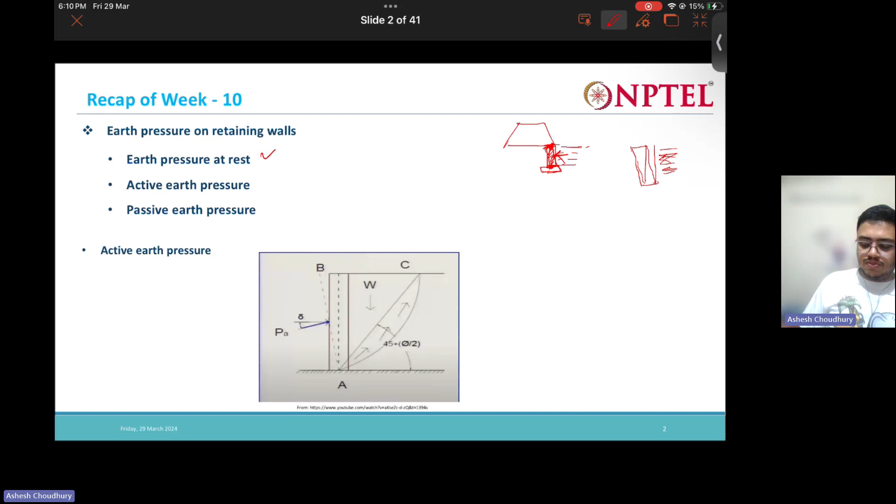After that we have active earth pressure. Active earth pressure means there is a tendency for the wall to move away from the soil it's retaining. In that case, whatever earth pressure the soil exerts on the wall is called the active earth pressure.

The passive earth pressure is the opposite - it's the tendency where the wall is actually moving into the soil. That is the passive earth pressure.

So you might be wondering under what conditions passive earth pressure takes place. Say you have soil like this, a retaining wall like this, and soil on this side too. There is a tendency that the retaining wall would actually move like this.

So if you see in this portion, what is happening? The wall is moving away from the soil here. So whatever earth pressure is acting here is nothing but the active earth pressure. And in this side also, up to here we will be having active earth pressure.

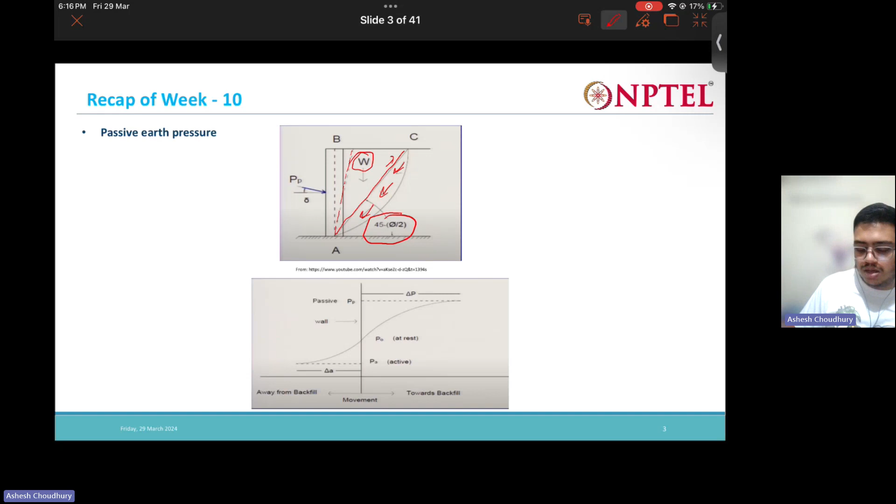And this W here is the weight of the failure wedge ABC.

Say you have a wall like this. There is a tendency for the wall to bend like this because soil is up, soil is like this here, or here also you have some soil. So what happens in this region? We have the active, and in this region we have the passive. If the rotation is about this point versus if the rotation is a total complete rotation, then the case will be something else. So it depends how much deflection the wall is having.

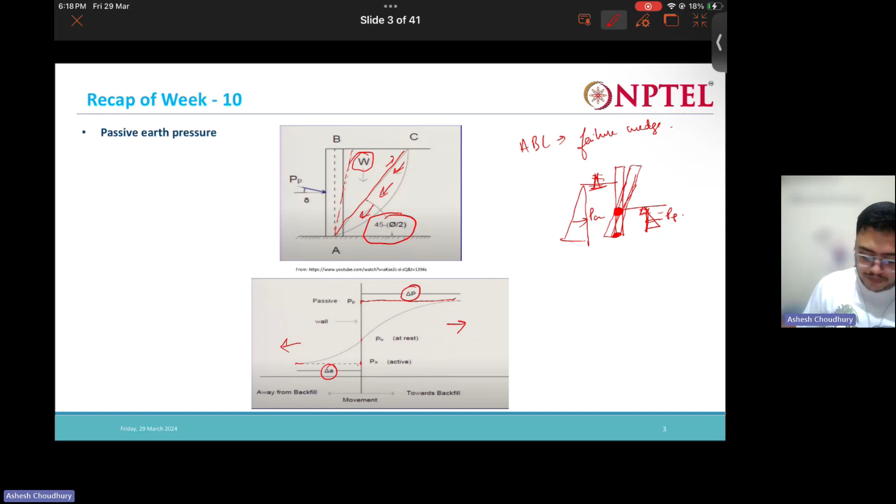Now let us see the Mohr circle representation of the earth pressures. So at rest - when the soil is at rest, this much is the vertical pressure that is acting, and at rest you have the earth pressure at rest that is acting.

If we take a soil mass, a soil cube, we will have a vertical stress acting on the soil. Take a point here - at rest you will have a vertical stress acting, and then we will have a horizontal stress. At rest, the horizontal stress is nothing but the earth pressure at rest. This one is greater than this one. If you want to plot in Mohr circle, this one will be sigma 1, this one will be sigma 3, so you can plot and get this circle.

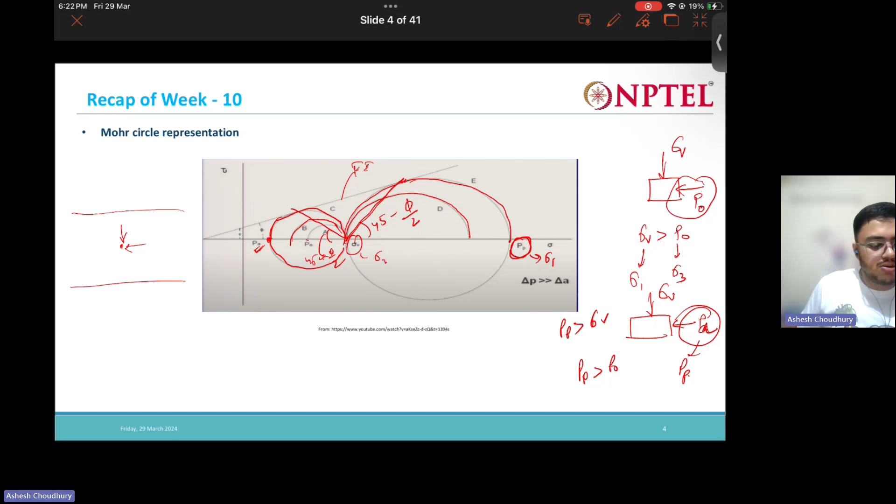Now if you measure this angle, it is nothing but 45 minus phi by 2, and this angle is 45 plus phi by 2. That's how we get these relationships from the horizontal.

Now, earth pressure at rest - how do we get the coefficient of earth pressure? Say you have a soil mass with vertical stress acting. The earth pressure at rest, or any lateral earth pressure, is some coefficient times the vertical stress. So how do we get this earth pressure coefficient?

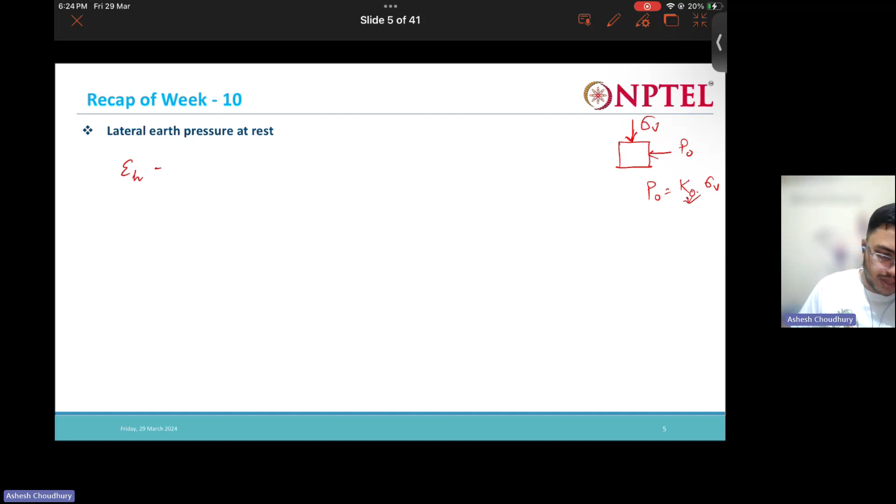The horizontal strain can be written as 1 by E times horizontal stress minus mu into vertical plus horizontal stress. Now earth pressure at rest means the horizontal strain is 0 - there is no movement of the wall, no movement of the soil mass, so the strain is 0. From there you can write that earth pressure at rest is nothing but K naught into vertical stress, where K naught, the coefficient of earth pressure at rest, is nothing but mu divided by 1 minus mu.

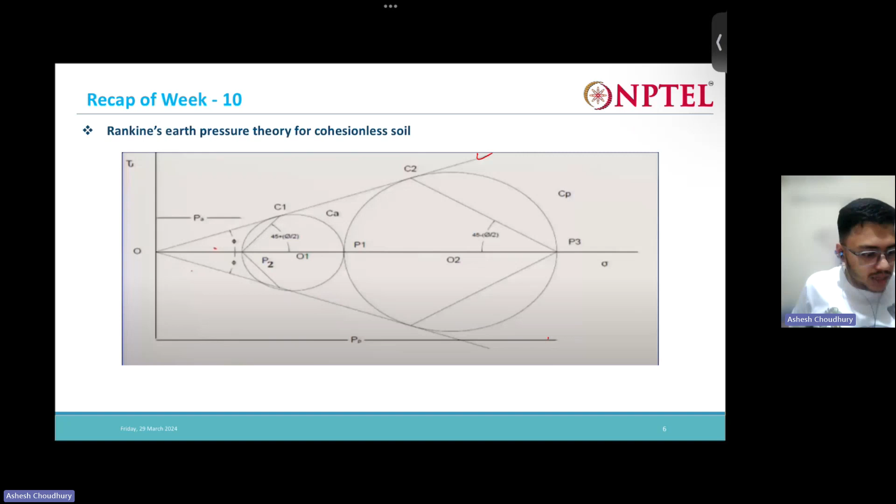This one we already saw in the previous slides. Now we have two more circles: this is the passive case, this is the active case. Here you can see the inclination of the failure planes given. This one will give you PA, this will give us PP.

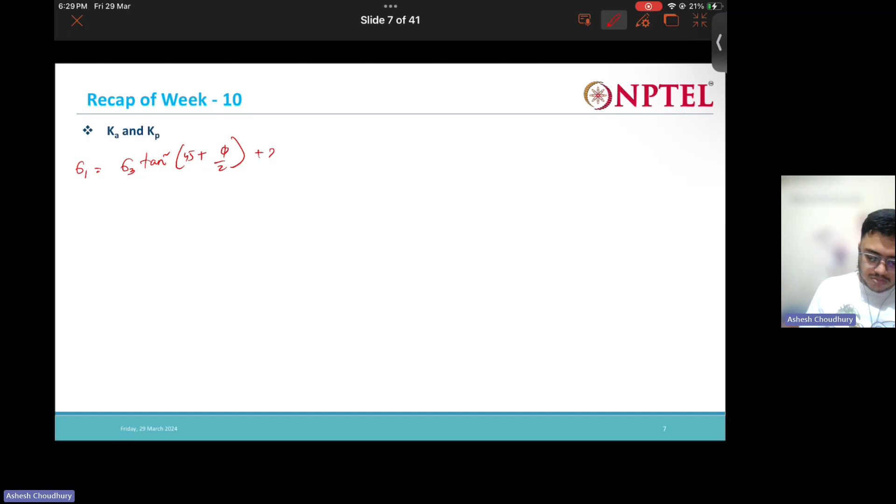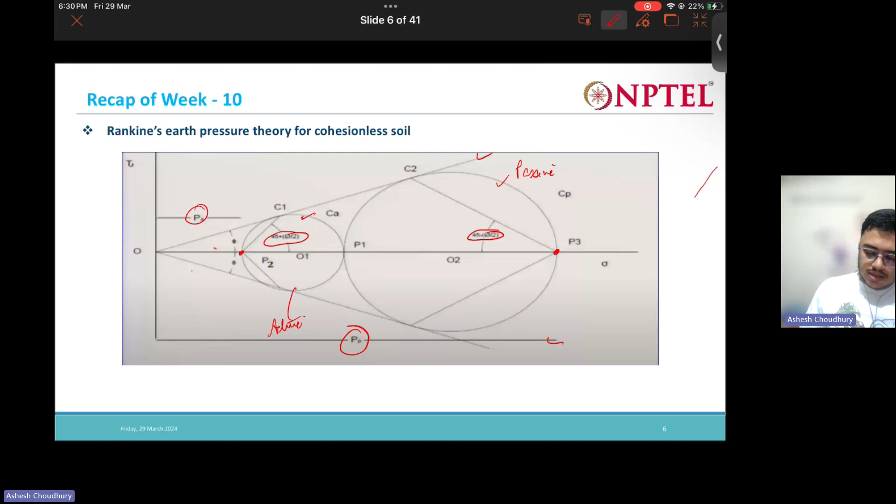If you recall, since we are dealing with the cohesionless case, C is 0, so this term will be 0. Now for the active case, this is our Mohr circle. Here sigma 3 is nothing but Pa, and sigma 1 will be nothing but the vertical stress. So sigma 3 is also Pa active, and sigma 1 is the vertical.

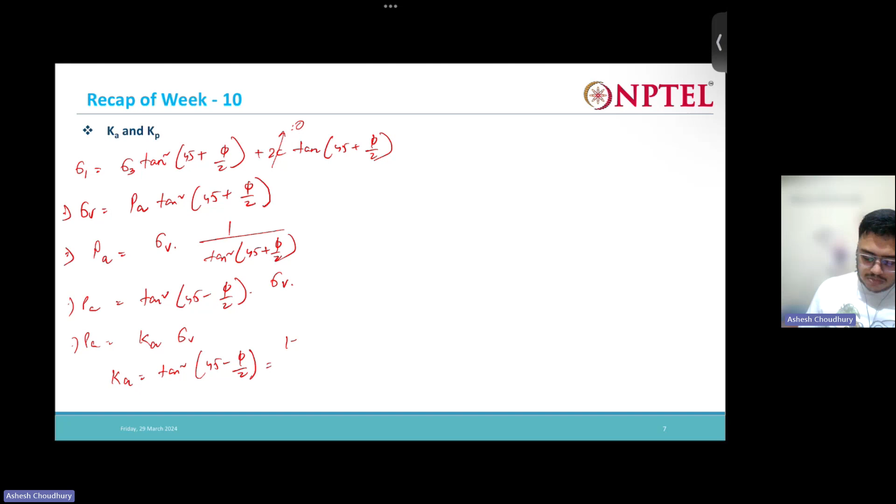Sorry, sigma 1 is the vertical, right? This is sigma 1, and this is sigma 3. So sigma 1 is vertical, sigma 3 is P, which is equal to... so this is nothing but Ka. Also write it like this.

Now what about the passive case? In passive case, it's the same, but sigma 1 is Pp. One more thing, if you see, K is equal to this expression, and there is a term called N phi -- sometimes this term is also known as N suffix phi. So this is how we get the coefficient of earth pressure for the active case and for the passive case.

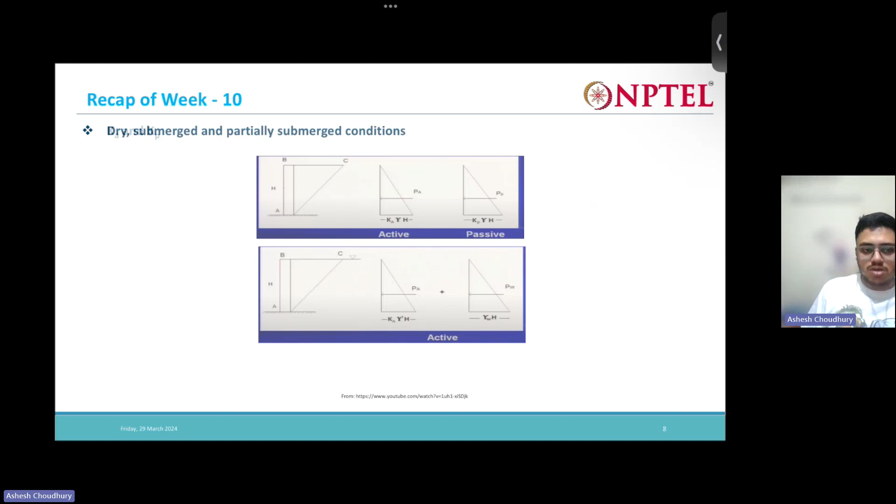Now let us see for these conditions how the variation of earth pressure happens: dry, submerged, and partially submerged conditions. So the first condition is this: this is the wall, and this soil is dry soil. So if the soil is dry, at any depth z...

At any depth z, the active earth pressure is Ka into the vertical stress, which is gamma into z. That's the vertical stress into K. What is the passive? Kp into gamma into z. So what we will be getting is a triangular variation in both cases.

So now how to get the total stress? Total stress is half K into gamma h into h, so we will be getting half K gamma h squared. This will give us the total stress, whether it is PA or PP -- this is the total lateral load acting, in force terms like Newton or kilonewtons. So this is the lateral load, and this is the pressure. The pressure and total load can be found by finding the area of the diagram.

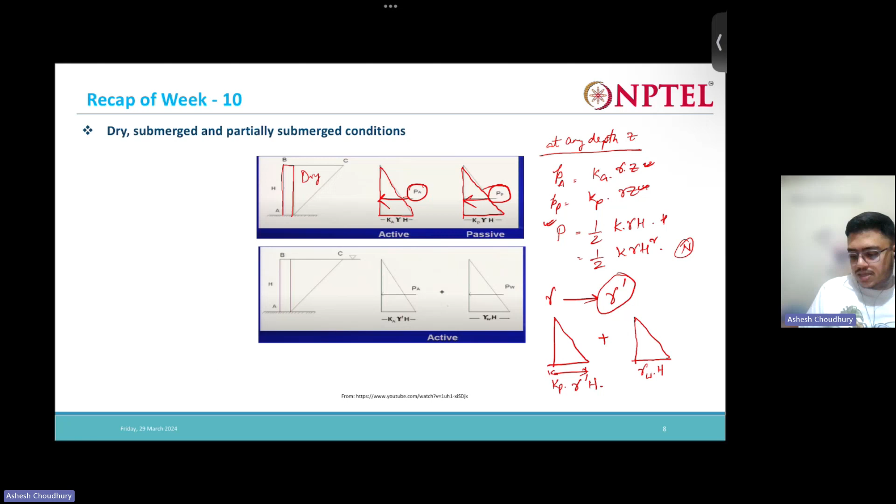So these two we need to add, always summing them up. Here the active case is shown; the same will be the case for the passive case also, just this will be replaced by Pp and Kp instead of Ka. Here active is shown, so other things will remain the same. So don't forget to add this part. All these things will get more clear as we solve the problems.

Now, what will be the changes if we have a partially submerged condition? So we have the water table at some depth, some height, and also a surcharge q acting on top of the soil. So first let us see: Ka and Kp, both will remain the same. It's just shown for Ka there, but think of it as K, it may be either Ka or Kp.

Now, for the surcharge, the lateral stress is nothing but K into Q. That will be a rectangular variation because at all heights Q is acting. So horizontally it will be K into Q at all heights - it is a rectangular variation.

Now for the upper portion, which is dry, we are going to have a triangular variation. Let's say this height is H1. So it will be K into gamma into H1, where gamma is the dry, or total, unit weight.

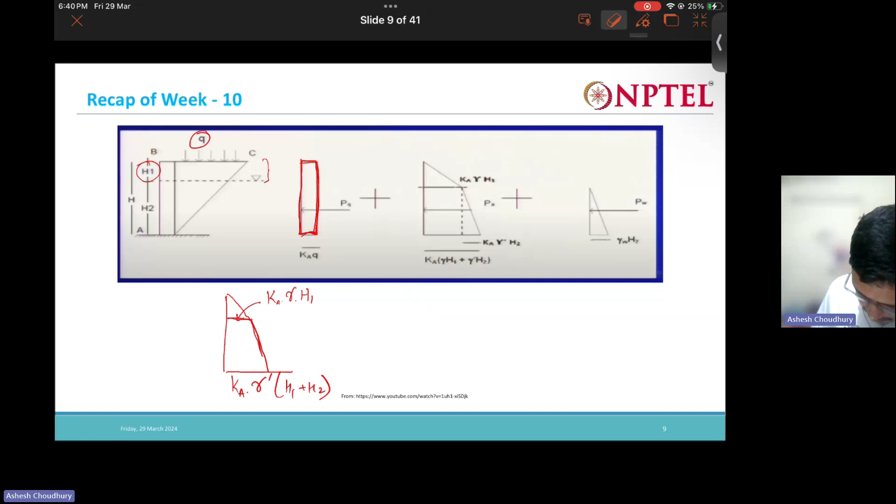Now, for the lower portion, it is submerged, so we add the submerged unit weight. So at this height, this is the thing, but at the lower point, it will be K into submerged unit weight into the total height, H1 plus H2. In this height the variation will look like this - you can see the slope has become a little gentler, because here the slope depends on this gamma.

Plus, obviously, for the lower portion we are going to have the water pressure as well: gamma w into H2, which is nothing but the water pressure. So all these you need to add up to get the total answer. We will see this as we solve the problems, and it will become more clear.

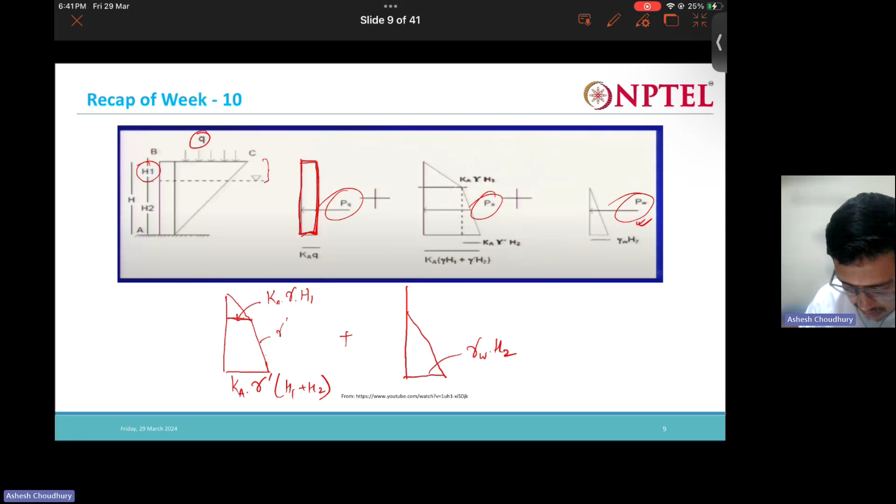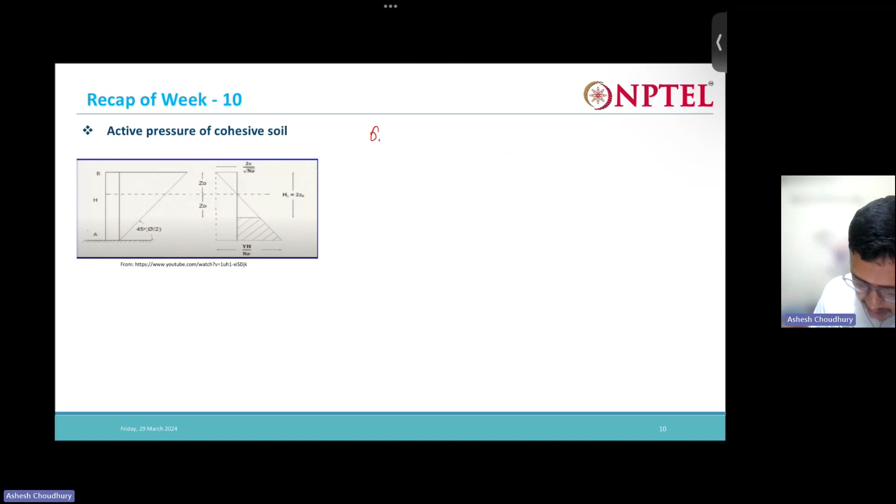As I said, this term can be written as what - this term is also called N phi. So what we will be writing in terms of, let us write in terms of N phi.

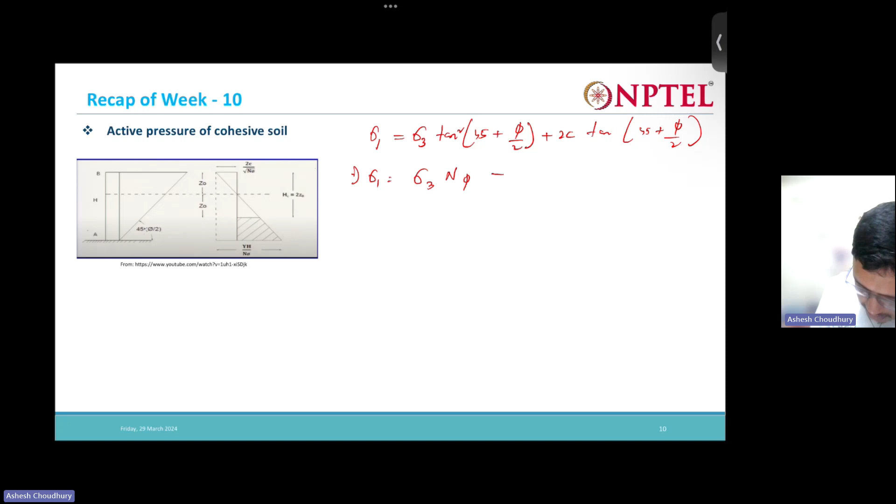Okay, now in the case of active, this is what? This is sigma V, this is PA, so if we do PA,

Right, so here you can see the first part is same like before. Here the pressure, the first part is same, nothing but K into sigma V. But now you are having this another part, this part. So when height is 0, when the depth is 0, when Z is equal to 0, sigma V is 0, so the first term will be 0, isn't it? The first term will be 0 as sigma V is 0.

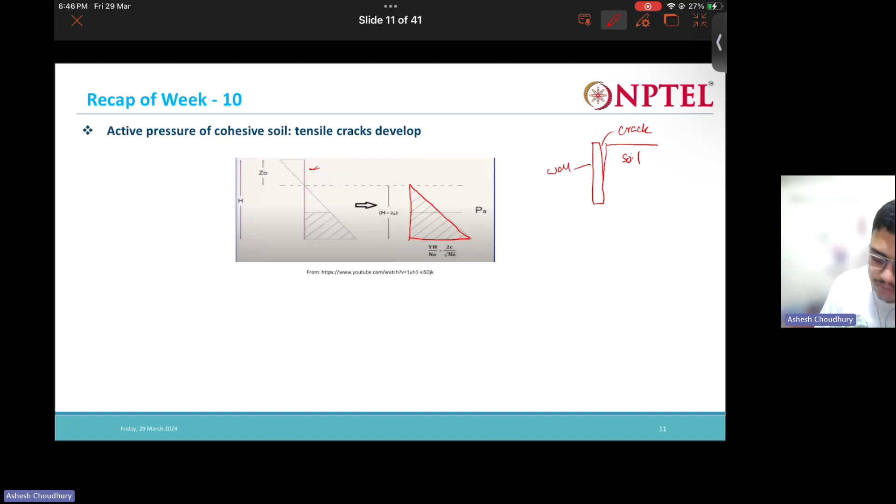So if tensile cracks develop, then this triangle, the below portion, so the top portion, what happens? The top portion, this part, nothing will be acting. It is not attached to the wall, right? So no stresses will be acting on the soil on the wall. So the area of the bottom triangle will give us the total earth pressure. That bottom triangle is going to give us the earth pressure.

Now what if, so this is the case when tensile cracks develop, but what if tensile cracks do not develop? If tensile cracks do not develop, what is going to happen?

This and this portion, they are going to cancel out each other, because positive negative they are going to cancel out. So the area of this bottom trapezium, that is going to give us the earth pressure. The area of the bottom trapezium, so this trapezium,

and this is gamma H by N phi, this is going to give us the 2c by root N phi, right? So this area of this trapezium is going to give us the active earth pressure. Okay, so these things actually we have to keep in mind.

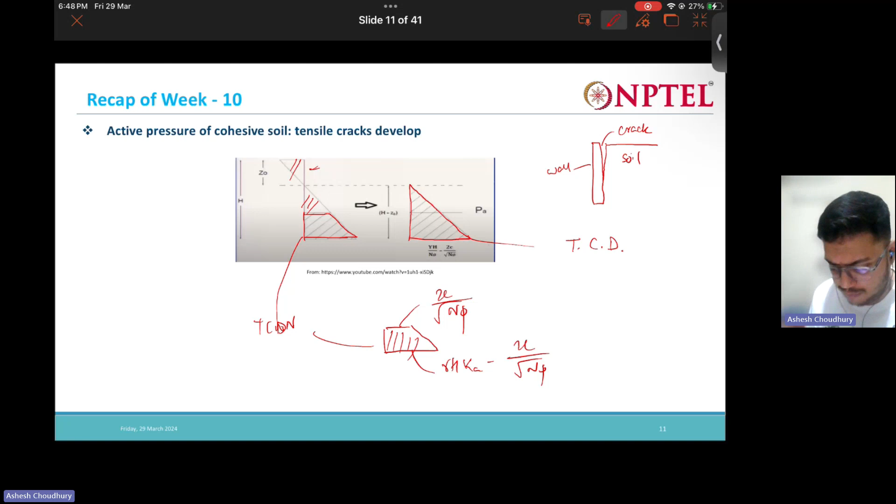What condition the soil is, what soil is it, whatever, how it is submerged or not, or that is dry, okay, tensile cracks are developing or not, all these things we have to keep in mind while we calculate for the earth pressures.

Now let us see the case of passive pressure. Okay, now let us see the case of passive pressure. So again we will just write the... right, so in that case, this is the passive pressure. So this also I can write N by Kp. Okay, so N phi is equal to Kp, equal to 1 by Ka.

So you can see here in case of passive, we have this part that is there. So that is nothing but, that will be like an extra, what to say, extra. This you can assume like an extra surcharge that is active. Okay, so that will be there throughout.

So at any depth you will have a, from this part you will be having this triangle, along with that at all heights you will be having this. This is 2c root over N phi, and this is to kp. Gamma into h into... all right, so this is how the variations actually differ in case of passive case, in case of active case, in case of cohesionless one, in case of cohesive.

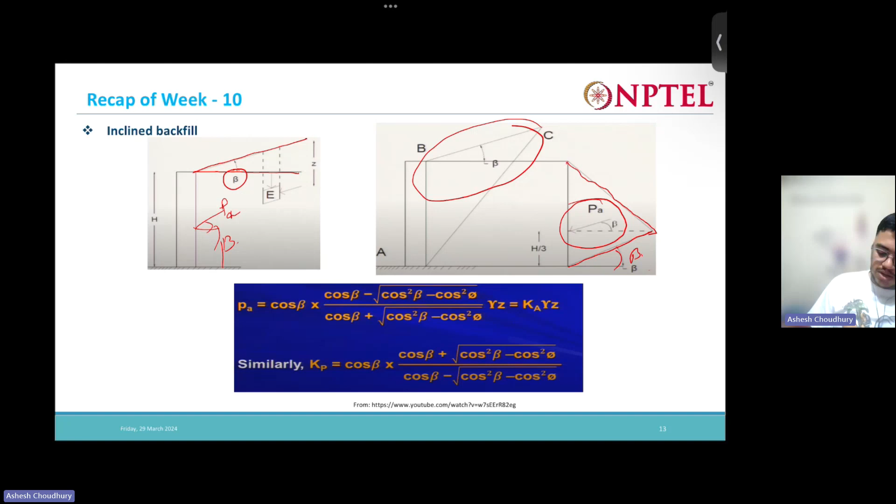In case of an inclined backfill, this is the expression for Ka, and this is the expression for Kp. These expressions change when the backfill is inclined at angle beta. By putting beta equal to 0, you can check if you are getting the original values, that is tan square 45 plus phi by 2, or tan square 45 minus phi by 2. You can verify this by putting beta equal to 0 in these two equations.

So these are all the basics from this part, and these are very easy. Actually this chapter is not that tough, it's quite easy. You just have to pay attention to what the question is asking - whether it is asking for active earth pressure or passive earth pressure, what conditions the soil is in, whether it is dry, submerged or partially submerged, whether you have surcharge, whether the soil is cohesionless or cohesive. If you pay attention to all these things, there is no chance that you will make a mistake. Otherwise it's very easy.

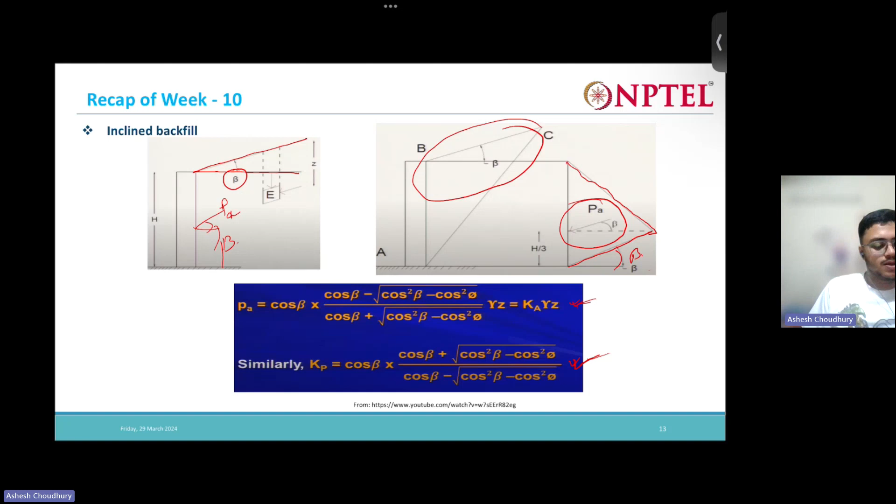So let us start solving the problems.

First question: a 15-meter high rigid retaining wall with smooth vertical back retains a mass of moist cohesionless sand with horizontal surface and following properties. Compute the total lateral earth pressure at rest and its location. If subsequently the water table rises to the ground surface, determine the increased earth pressure at rest.

Initially the soil is moist, but after that the water table rises to the ground surface, meaning the whole soil is going to get submerged. In that case the earth pressure is going to increase, which we also need to find out. We will see here that due to this water, if the backfill soil is submerged, the earth pressure increases by a large extent. This is very important.

So while we design retaining walls, we provide some weep holes in the wall so that the water is able to drain out, or some filter and drainage arrangement between the soil and the retaining wall, so that the water actually drains out. If water gets retained in that backfill soil, it generates a huge amount of lateral earth pressure, which is actually detrimental to safety. Sometimes if the soil gets submerged, it generates a huge amount of earth pressure, and that earth pressure can result in the failure of the retaining wall. So we need to provide proper drainage so that the water drains out.

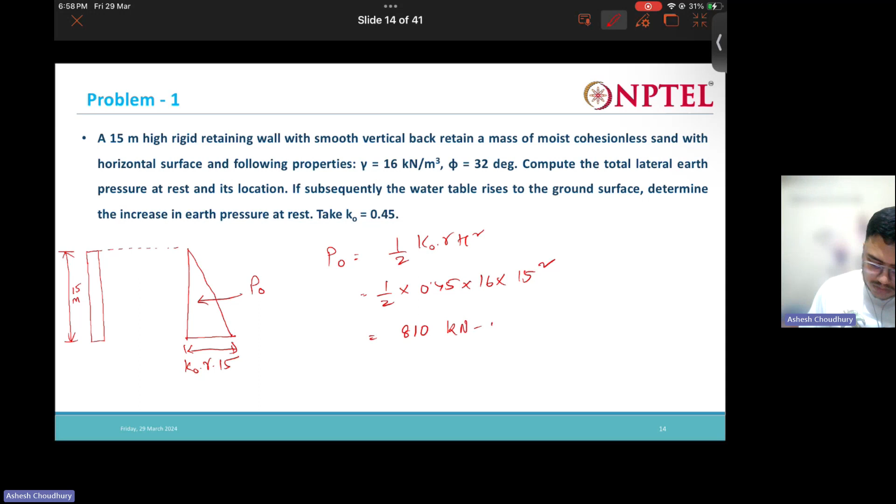P naught total will be half K naught gamma h square, so half into 0.45, this will come out as a certain value in kilonewtons per meter length of the wall. Okay, now this is the first case.

Now what if the soil is submerged - the water table rises to the ground surface with the soil getting submerged. In that case, what is the submerged unit weight? Moist unit weight minus the buoyant correction. So in that case, for this wall, we have K naught into gamma submerged into height, and after that this water pressure will also get added into it. So P is P1 plus P2, where P1 is half K naught gamma submerged h square, plus the water pressure term.

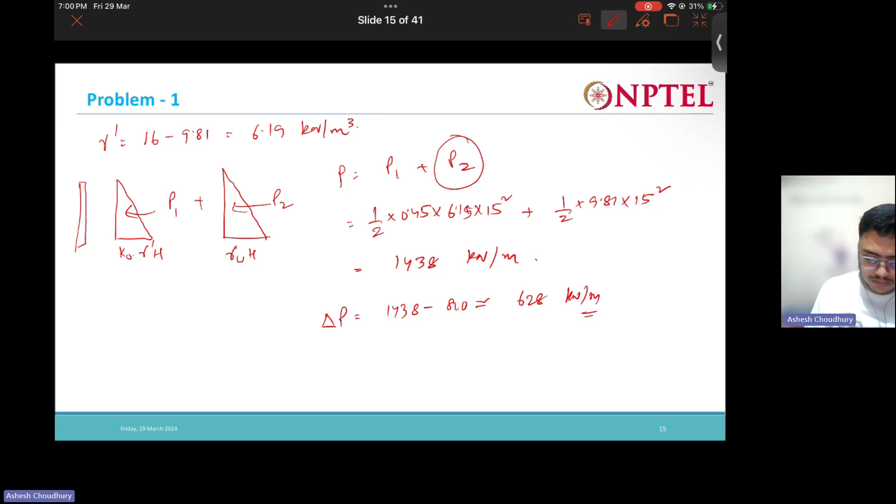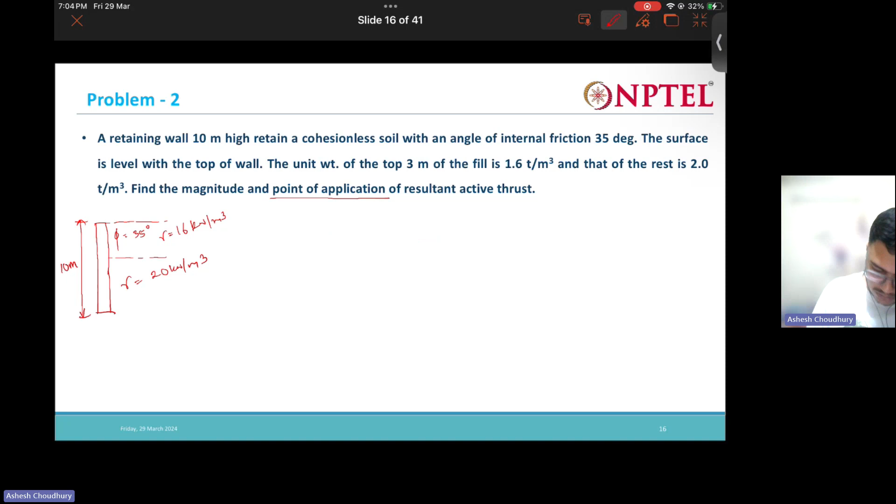Should be 0 point. Now let us come here. So the first top portion, top 3 meters, this is what? This is 16 into 3 into... okay, here we have. What about here?

So at the bottom, so this part, this is nothing but 27. Understood? And this part, so this is, okay, and this will be, okay. This one is, this one is same, 13.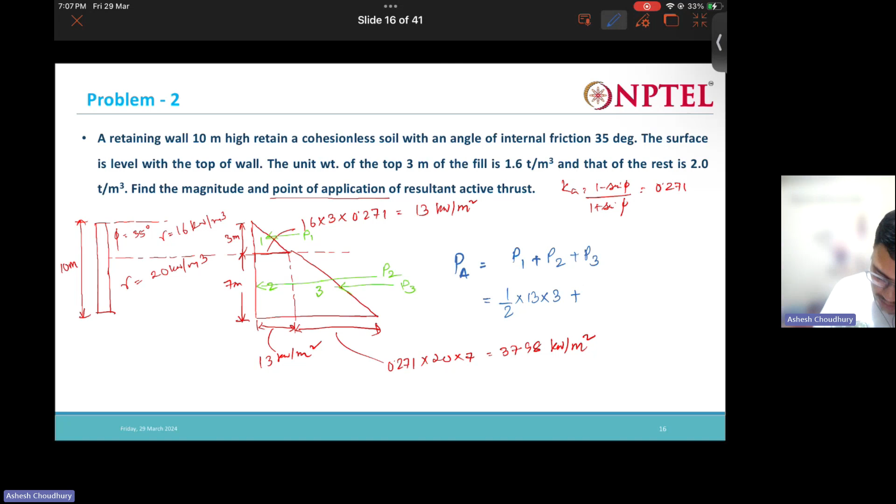Out of that, P1 is what? Half into 13 into 3. P2 is what? 13 into 7. P3 is what? Half into 37.98 into 7. So this one will be total, it will come out as 243.3 kN/m. So this one is 19.5, this one is 91, this one is 132.93.

Now how to find out the point of application? For point of application, what we will use, we will use the centroid formula. So P into Y divided by total P will give us the centroid of the point of application. So P1, P1 that is area of this, P1 is acting at a height of 7 plus 3 by 3, means 8 meter from below. So we'll write 19.5 into 8. Because the centroid of this triangle is here 1 meter from here, so 8 meters from here.

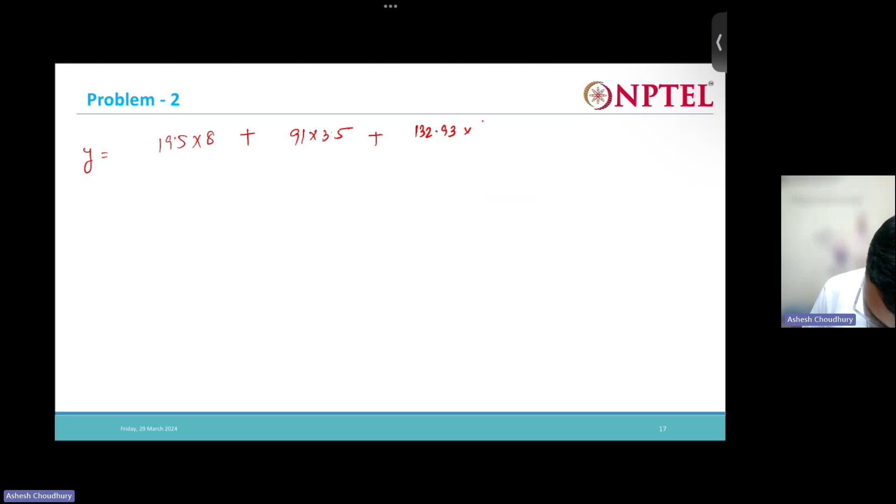Again for the rectangle it is acting at 3.5, so 91 into 3.5. Then we have the last, this triangle, here we are having 7 by 3, so what it is acting at, 7 by 3, so 132.93 into 7 by 3, divided by the total. What is the total? 243.3. So this will give us 3.22 meter.

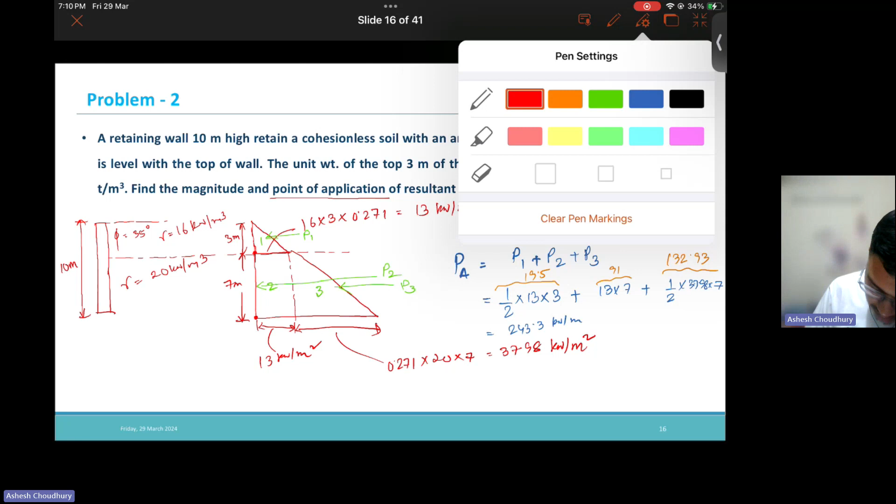So the final P is acting at PA 3.22 meter. That's okay. This PA is acting at a 3.22 meter height from the base. So this is how we have to solve it. Right? Understood?

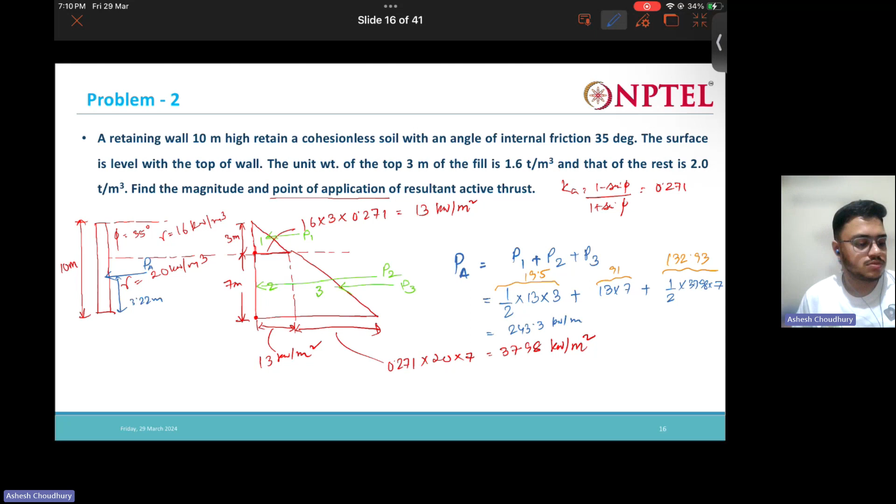Now let us see the next problem. A retaining wall 5 meter high retains a cohesionless soil, C is equal to 0, with an angle of internal friction 35 degree. The surface is level with the top and the water table is below the bottom. So, now question of water. Determine the percentage change on the active thrust on the wall due to the water table. So similar to the first problem, we need to do this.

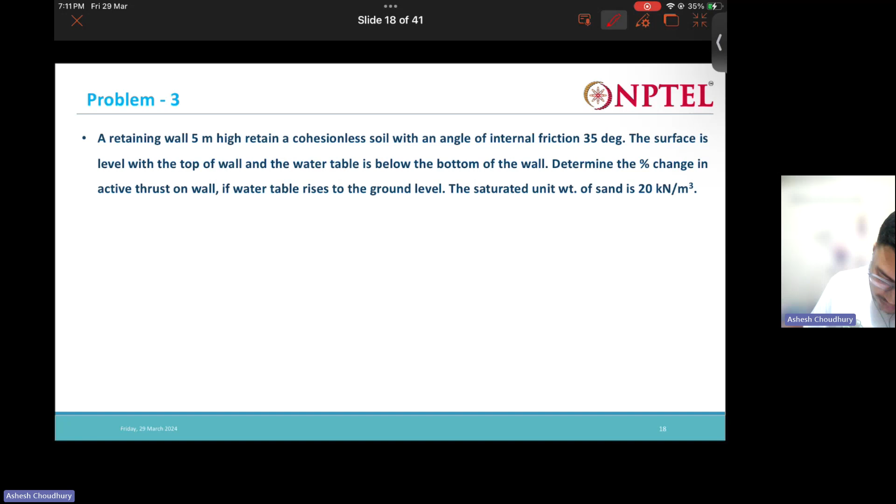So let us determine first all the required things. So first was what? How much will be this? 0.271 into 5 into... how much? I went to, so one more information actually it should be given, and 17 is the unit weight, 17. Therefore PA is half into 5 square. This is 5 meters.

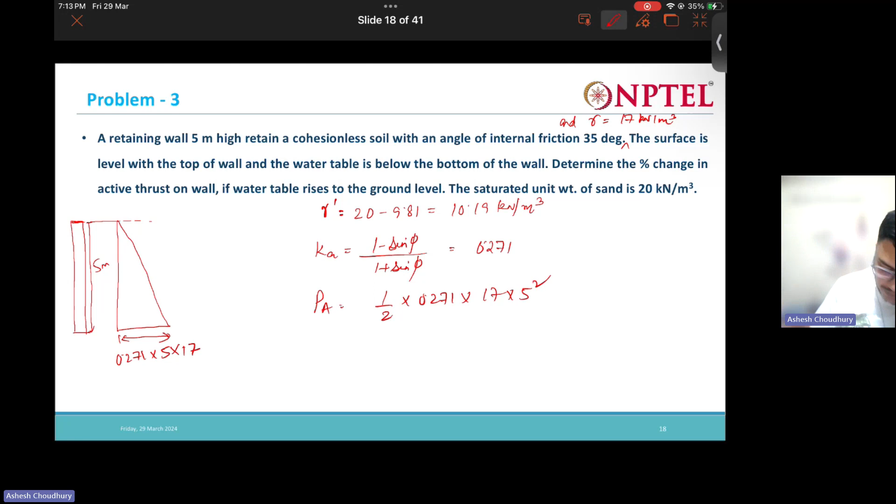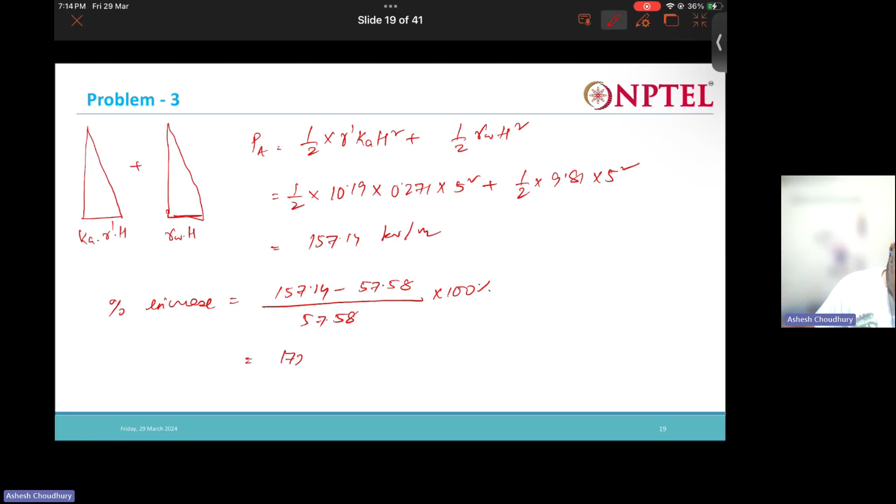157.14. Percentage increase, so you can see approximately 173%, the earth pressure is increasing due to the submergence of the backfill soil. As the water table rises to the top, the whole backfill soil gets submerged, and due to this submergence, the earth pressure is increased up to 173%.

So you can see huge increase in earth pressure only because the soil is submerged. So clearly, we have to drain out the water effectively. We cannot allow water to stay. We have to drain out the water from the backfill. That's why whenever we construct a retaining wall, we give required provisions so that the water is able to drain out, whenever it rains or whatever, water is going to drain out easily from the backfill. Else you can see huge amount of water, huge amount of extra lateral force acts on the retaining wall.

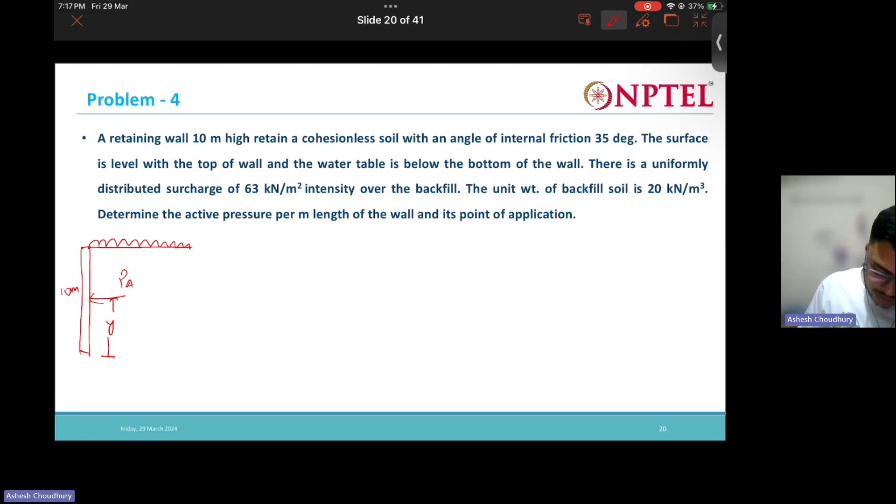So this is 10 meter, and we have the PA acting somewhere at a height y. This we need to find out. So due to the surcharge, we will have some rectangular variation, right? It is nothing but Ka into Q plus...

Okay, so gamma is 20, K for 35 degrees, so again 0.271. So P will be what? This plus this, so 0.271 into 63 into height is 10, plus half into 0.271 into 10 square into 20. So 170.73 plus 271.

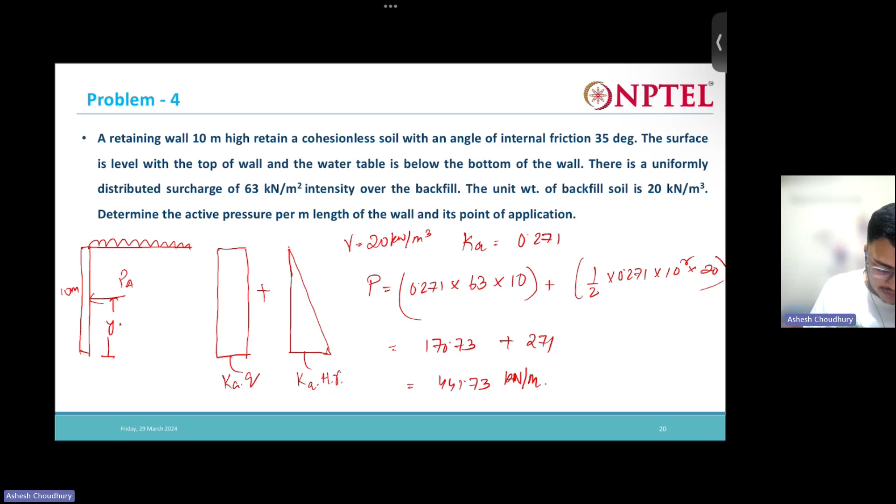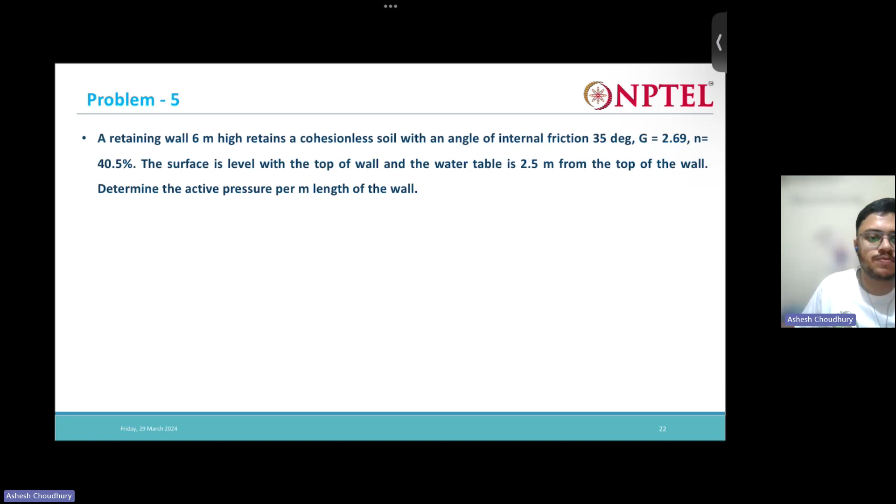A retaining wall 6 meter high retains a cohesionless soil with angle of internal friction 35 degrees. G is equal to 2.69, and porosity is given as 40.5%. The surface is level with the top of the wall, and the water table is 2.5 meter from the top of the wall. Determine the active pressure per meter length of the wall.

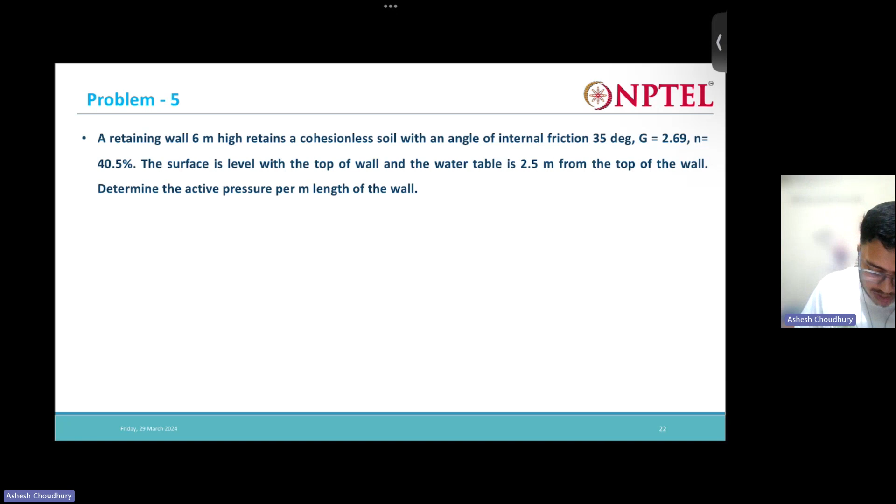E, how to get from n? e is equal to n by 1 minus n... so from here we can get 0.68. So we get 15.7, plus submerged also. Now K is 0.271 since it's 35 degrees, that we already know.

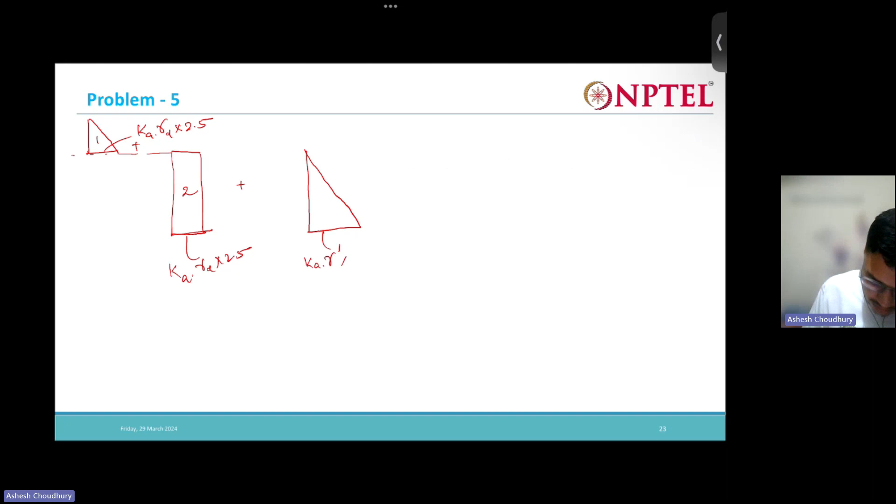2.5. Now plus, so this plus this plus this. This is K gamma submerged into, what is the height? 3.5, right? Last, plus fourth one due to water, you should not forget this. Not K, sorry.

Done. Now let us find one by one. What is P1? Half into K into 15.7 into 2.5 square. So this will give us P2... yes, 3.5 is the height, and below height 2.5, 3.5, so that's why 3.5. 37.23.

P3... plus 60. Then we have P4... okay, so total PA, this will come out as...

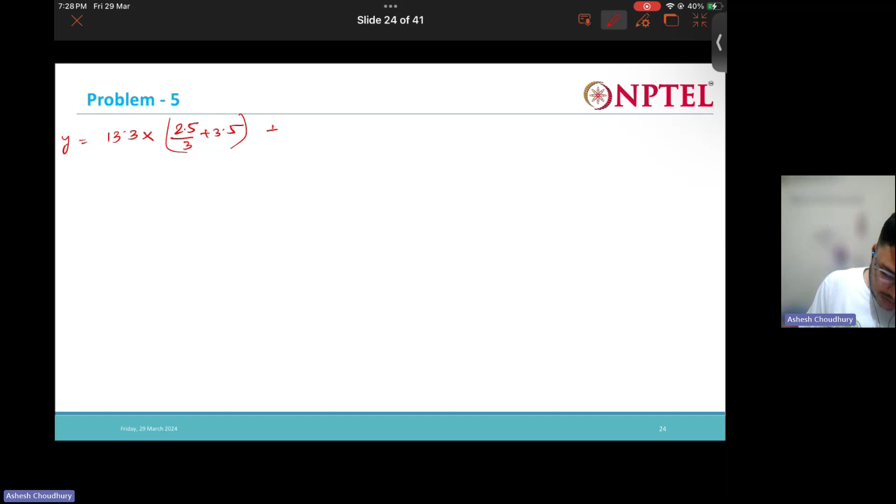Alright, done. Now we have to find the point of application. Same centroid you will use. 13.3 into 2.5 by 3 plus 3.5. Okay, then we have 37.23 into 3.5 by 2. Then we have 16.37 into... by 3. Then we have...

The amount is 1.68 meters. So finally, if I draw, how much is it? 1.68, quite below.

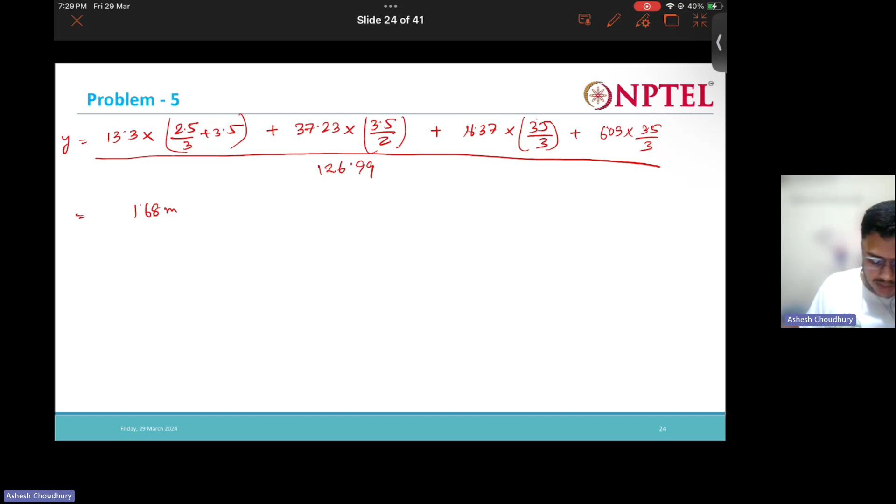Okay. This is how you have to do. Now let us come to the next problem.

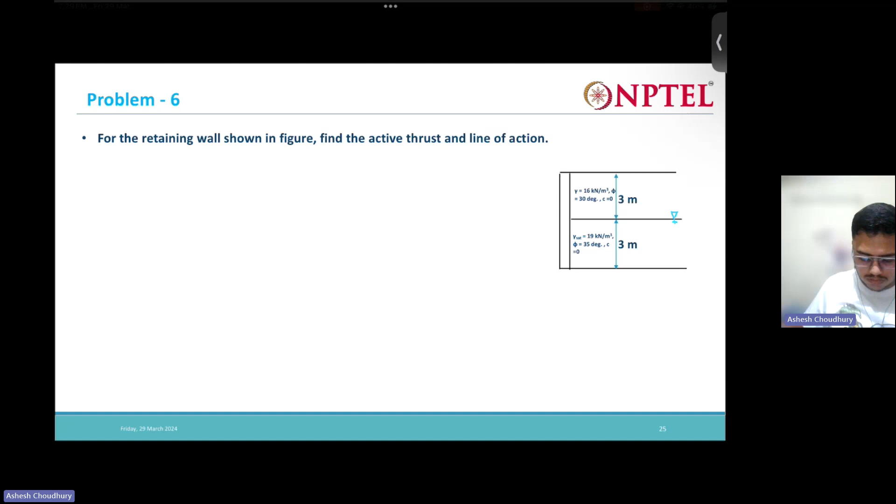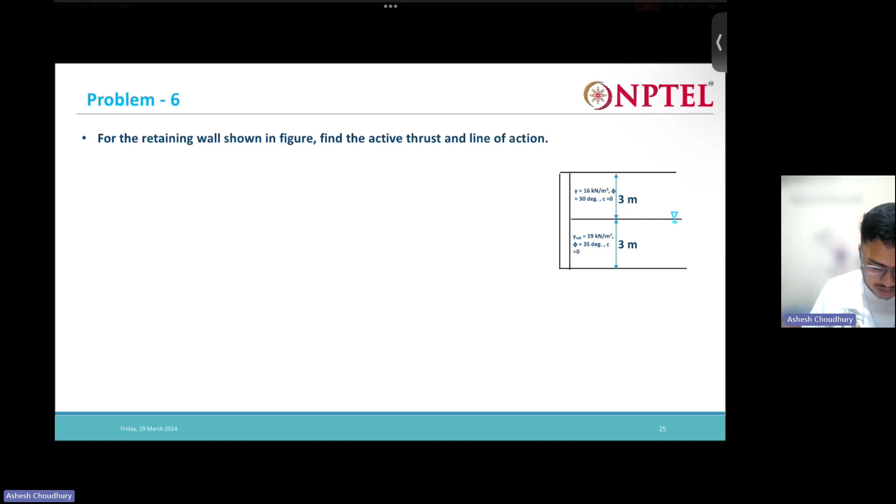Just a second. So there will be two ways. You can see phi's are different, right? Friction angles are different for top and bottom, right?

So K1 will be 1 minus sine 30 by... 0.33, and K2 similarly will be 0.271.

And below this soil you can see it's submerged, so water table sign is there, that means it's submerged, right? So it is submerged, so let us find the submerged unit weight. Okay, rest everything is there.

So let us also for the upper part, so upper half, we have this, what is this, k1 into 16 into 3.

All right, now let us come. So again this will be acting as a surcharge for the below part. So it will be 16 into 3, surcharge of 16 into 3 into k2.

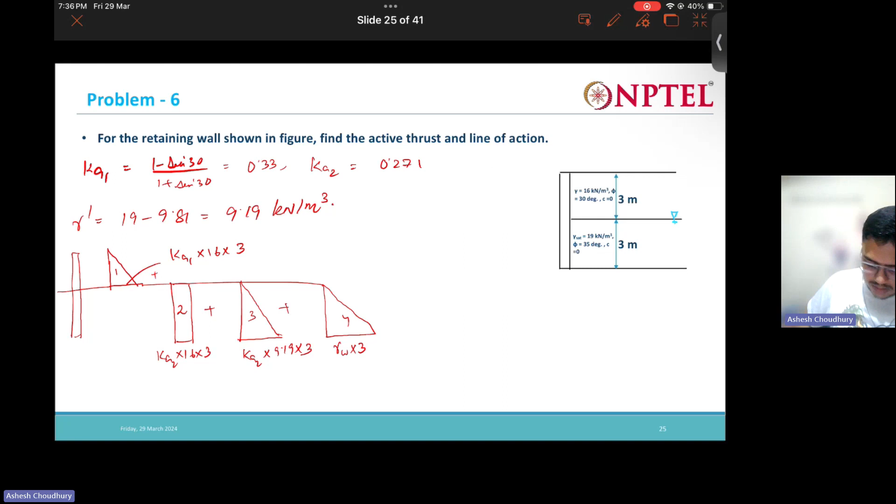So now what we can do, now we can calculate all the p's. p1, so same only, right? So I hope you were able to do that, just a little difference with different phi values, so k values are changing, that's all.

P3 half into square, P4, so total what, p is equal to...

Calculate this, see how much is it, just tell me how much is it.

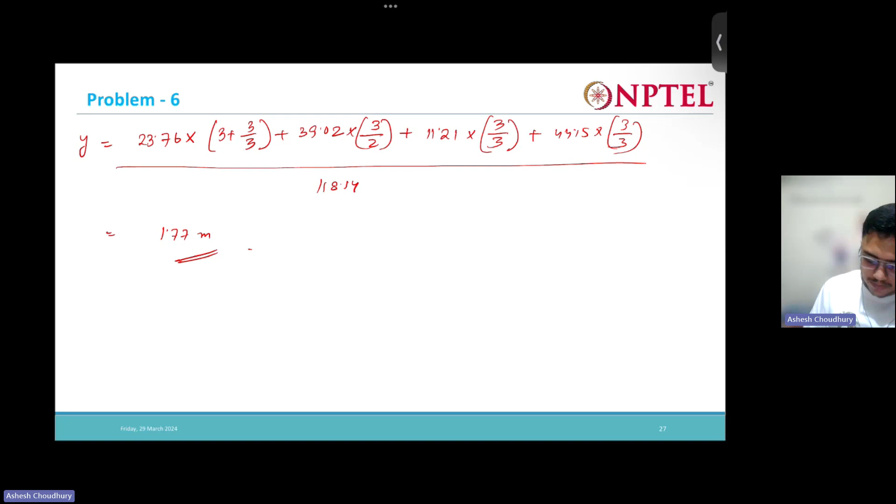Now let us see this problem. A soil mass is retained by a smooth inclined wall of 6 meter height. Soil has a bulk unit weight of 20 kilonewton per meter cube and an angle of internal friction 16 degree. The top of the soil is level with the top of the wall and is horizontal. If the soil surface carries a uniform distributed load and the surcharge is there, determine the total active thrust on the wall per meter and the point of application.

So it's completely same, but there is a change. I am just going to draw the diagram of the wall for you. This is given in the question. So this is 6 meter, this is 18 degrees.

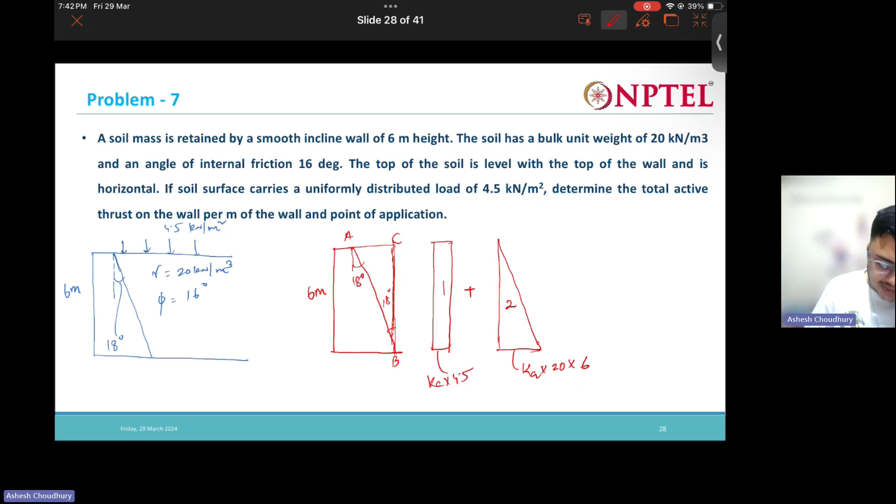So now in this case, in this condition let us find P1 and P2. So P1 will be, so let us K also we need, right? 0.568. So 4.5, 0.568 into 6.

P2... PA dash. Let us write this as PA dash. 15.33 plus...

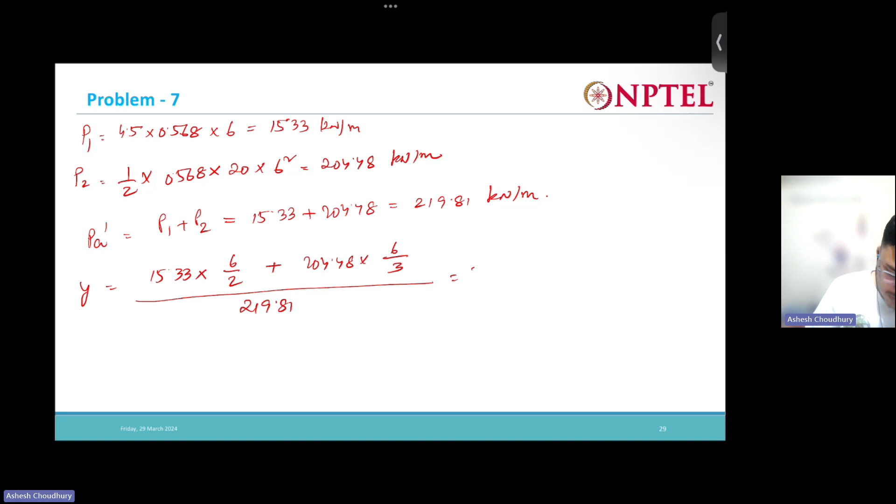Now see what we did was, the wall is something like this. So for this wall we found out the pressure on this imaginary surface, this straight portion. Now to find out the pressure at the wall surface, we can take the weight of the soil wedge, this ABC soil wedge, this ABC imaginary soil wedge, and take that weight.

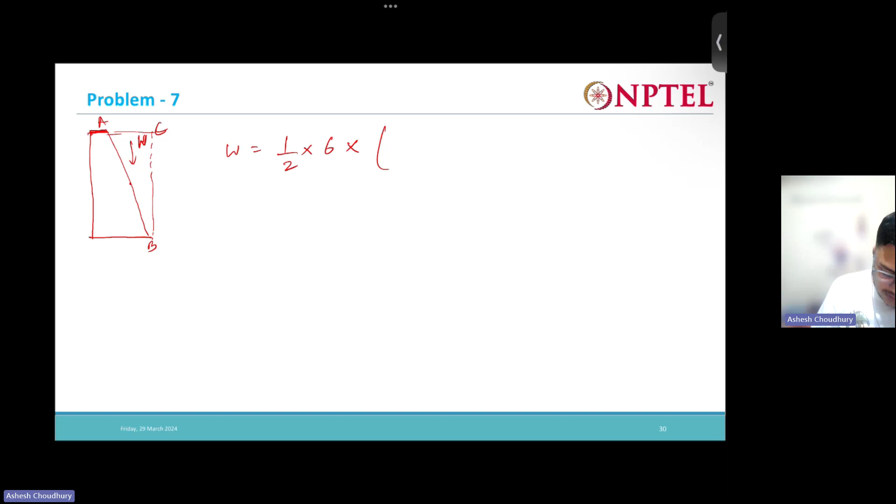So this weight is nothing but half into 6, the height, into AC, into 20, into 1. AC is nothing but 6 tan 18, 20. So this will be 116.97.

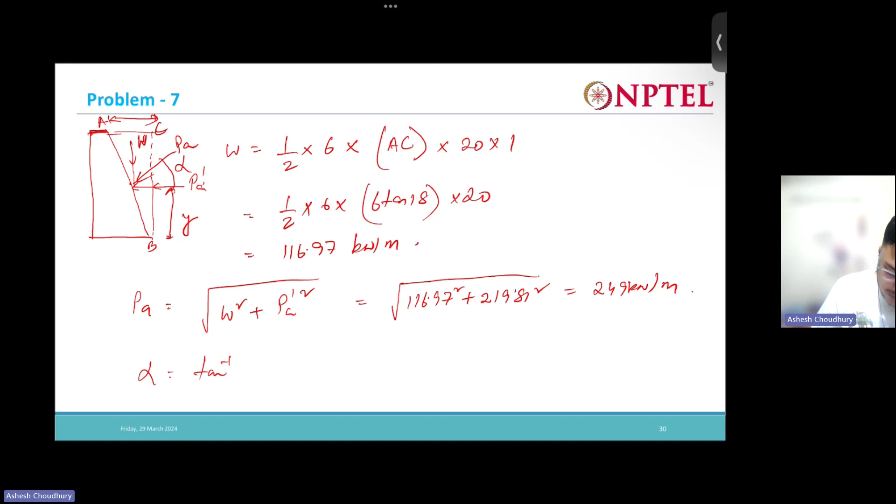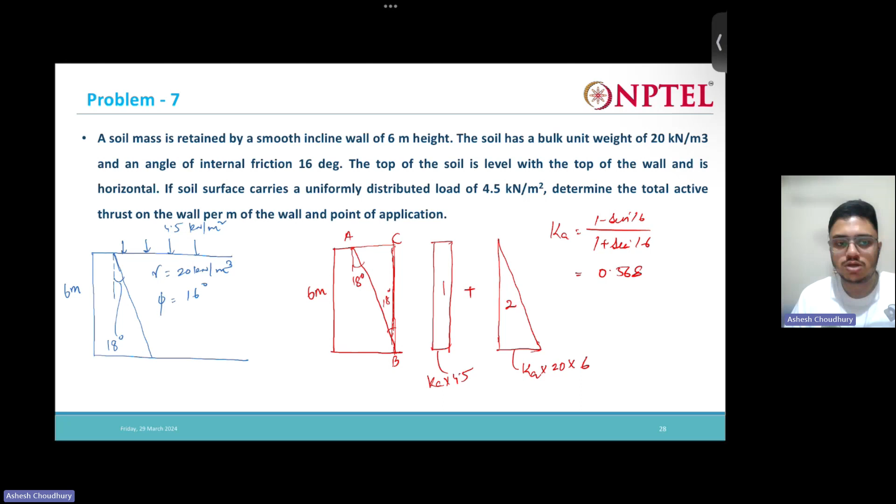As the wall surface is not straight here, it's inclined, we need to use this technique to solve the problem.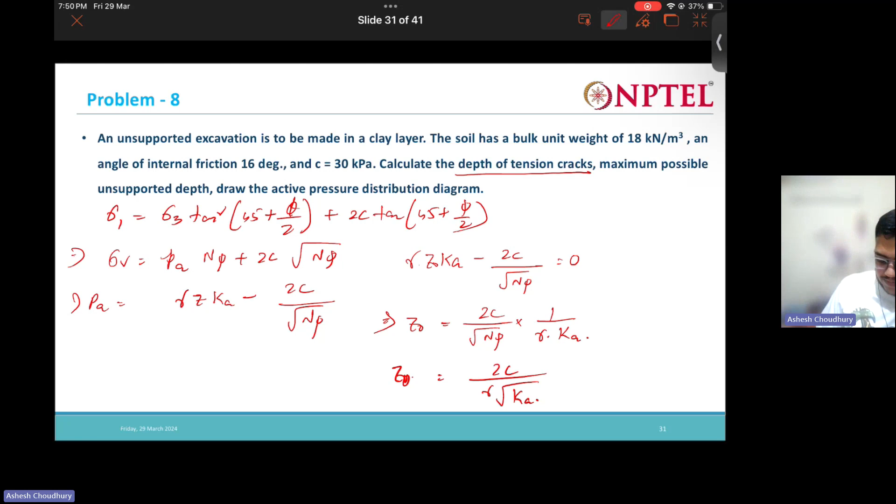What is n phi? Root over n phi, tan square 45 plus phi by 2, so this one we can write actually as twice c over gamma root over k. Okay, so this is nothing but z naught. Therefore that is c, 18 into root over 0.704, for 10 degrees it's 0.704.

So this is the depth of tension crack. Alright, so k I will write here as 10 by... okay, now this is actually 10 degree, this is 10 degree.

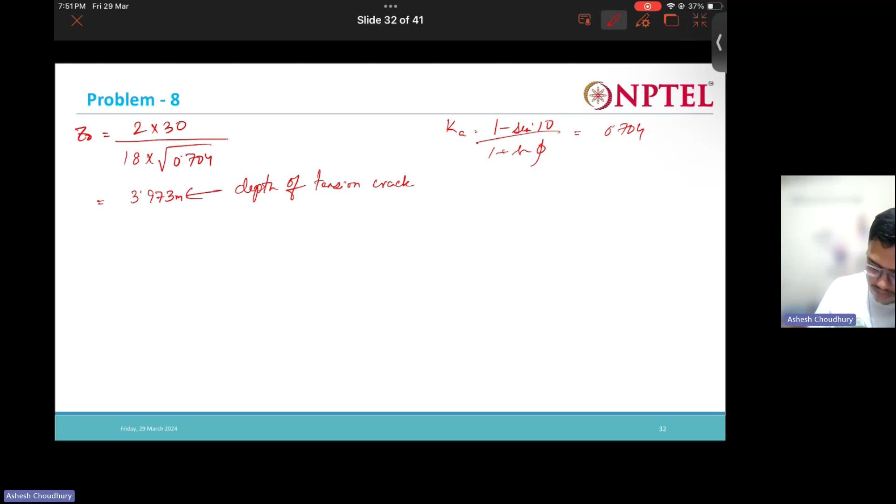Now what we need to do next, it is asked to calculate the depth of tension crack and maximum possible unsupported depth. So maximum possible unsupported depth means twice z naught. If tension crack does not develop, what happens? As I said, the upper triangle and lower triangle cancel out, so it is something like this. This upper part and this cancel out, so the total height is twice z naught, and this is z naught, where depth is twice z naught.

Now what we are asked is to draw the active earth pressure diagram. So the active earth pressure diagram is nothing but like this. You can draw that, right? Nothing but like this, something like this. This is nothing but twice c by root over n phi, and this is the height.

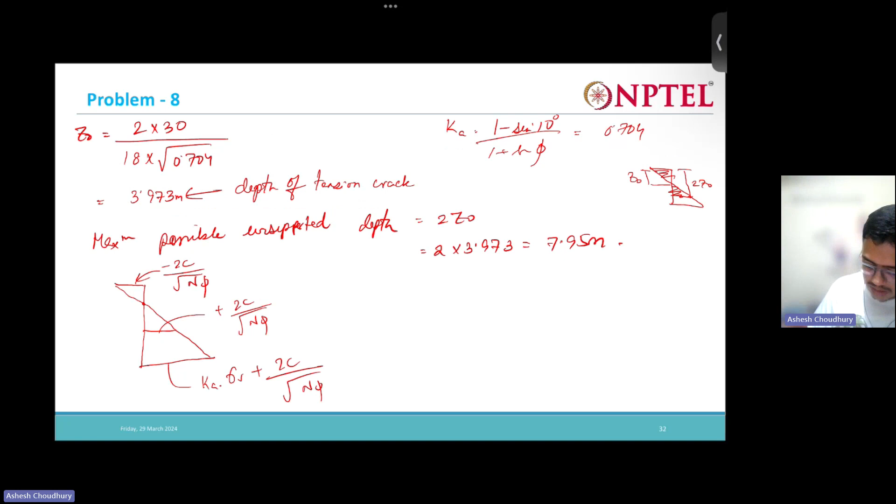Now next problem: a smooth vertical wall 4 meters retains a cohesive soil backfill with a bulk unit weight of 18 kN, angle of internal friction 0 degrees, and c is equal to 10. Calculate the depth at which earth pressure is 0, that is z naught, the depth of tension crack, the depth at which total active thrust per unit length of the wall is 0, and total active thrust when tension crack does not develop, meaning only the lower trapezium area will come. Let us calculate one by one.

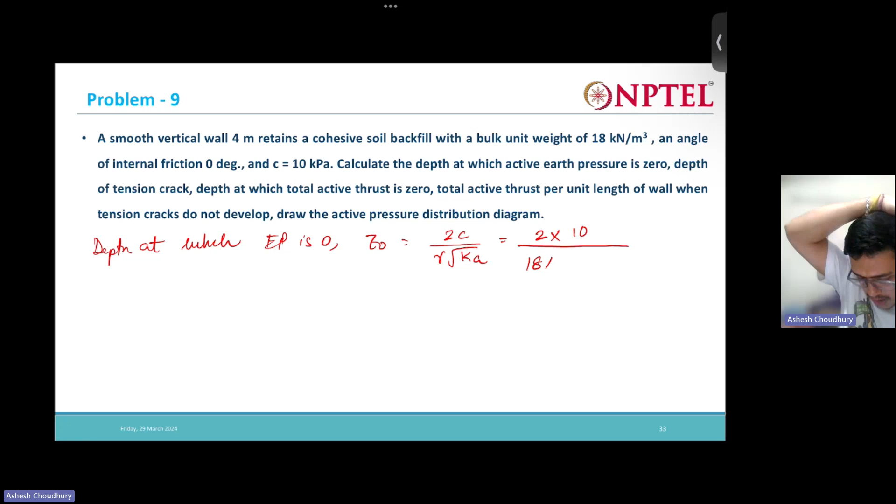Depth at which earth pressure is 0, nothing but z naught: k equals 1 minus sine 0 by 1 plus sine 0. So k is nothing but 1.

Now the next question is depth of tension crack, so the depth of tension crack is the same, that is the depth of tension crack. Now last is the depth at which total active thrust is calculated when the tension cracks do not develop. For that, the total height is 4 meters, right?

So out of this 4 meters total, this one is 1.11 meter, and below that this one is also 1.11 meter. Now tension cracks do not develop, so this part and this part are going to cancel out each other. So the area of this trapezium gives the pressure.

Now for that, what is this base? That is nothing but 4 into gamma, 18 into Ka. What is Ka? 1, minus 2c by root over n phi. Root over n phi means root over Ka, so root over n phi I can write as root over Ka. So 1 by root over n phi is equal to root over Ka.

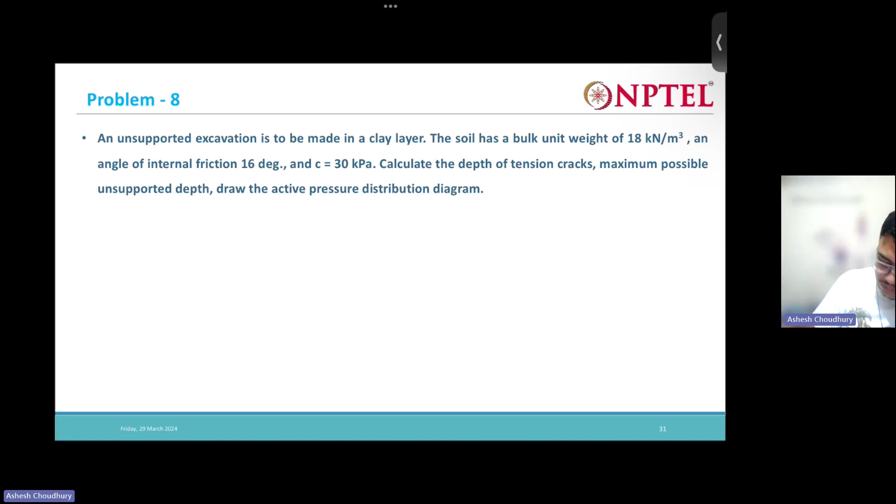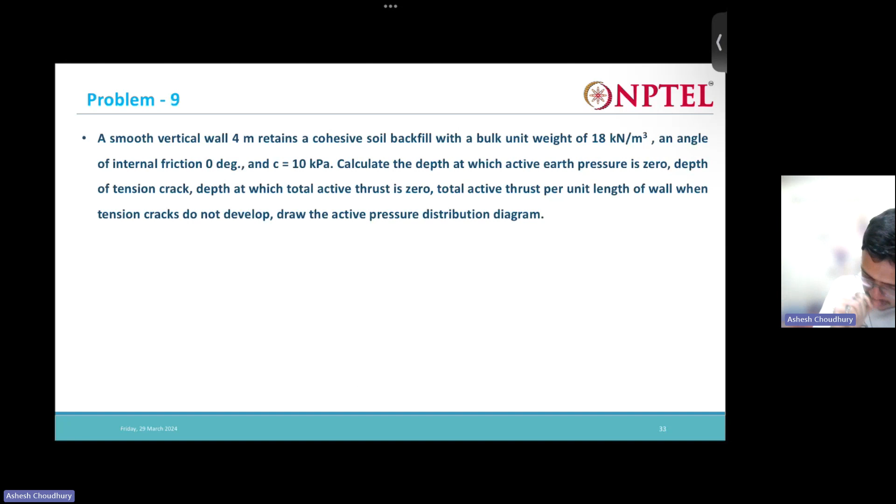Okay, so this is minus, right? Yeah. Root over K means minus 2c, just minus 2c. So this will be 52. Okay, so 72 minus 2 into 10 means 20. 72 minus 20 is 52, right?

So the area of this trapezium is going to give us the active earth pressure. So what is it going to be? Pa is half into sum of parallel sides.

So this one is how much? 2c, 2c, so 52 plus 20, or 52, and this one is 20. Into this height, height is 4 minus 2.22, 4 minus 2. So it comes out as 64.08.

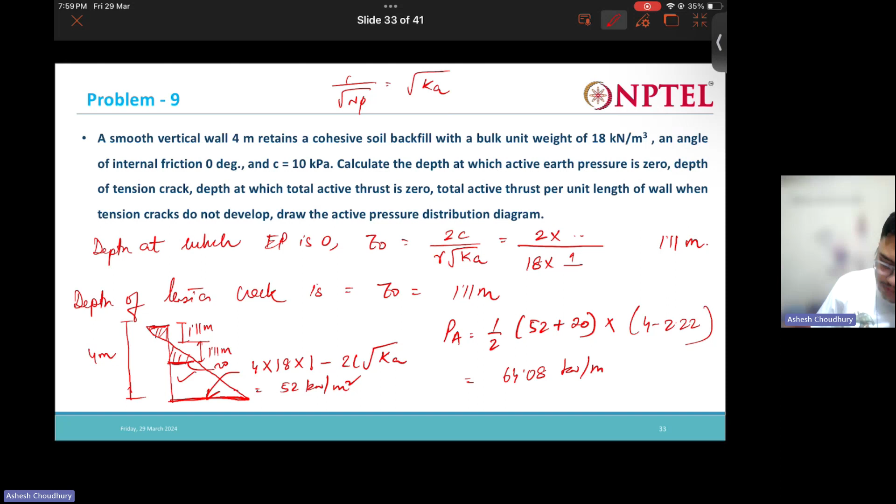And the point of application, point of action of A from bottom.

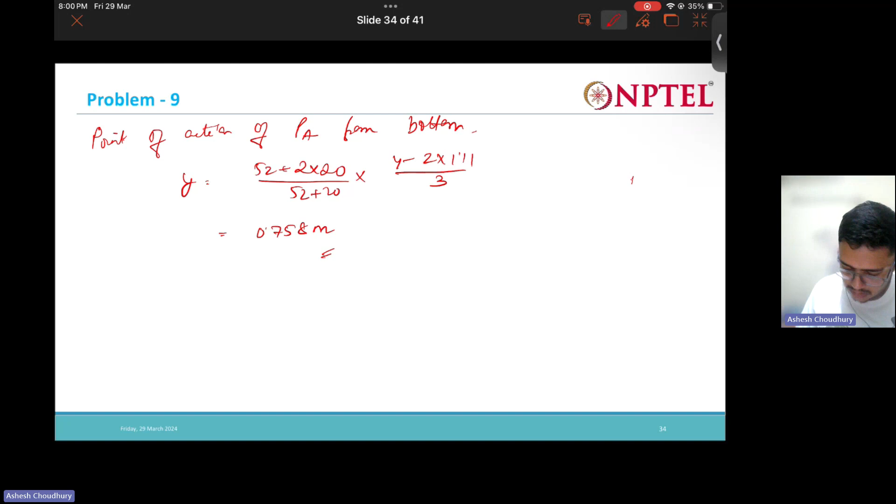Okay, now let us see this problem. A smooth vertical wall 5 meter retains a cohesive soil backfill with a bulk unit weight of 18 kilonewton per meter cube and angle of internal friction 20 degrees and C is equal to 30 kPa.

Calculate depth of tension crack, total active thrust per unit length of the wall when tension cracks are fully developed. So now tension cracks are fully developed, right? So if you remember, if tension cracks fully developed, this is going to get considered. The area of this triangle is going to give us the total PA, right?

So in this case, what is Ka? K is 1 minus sine 20 by 1 plus sine 20, which comes to 0.49. Total it's 5 meters. So this height is going to be 2c by gamma root over Ka. So 2 into 30 by 18 into root over 0.49, so it comes out to be 4.76 meters.

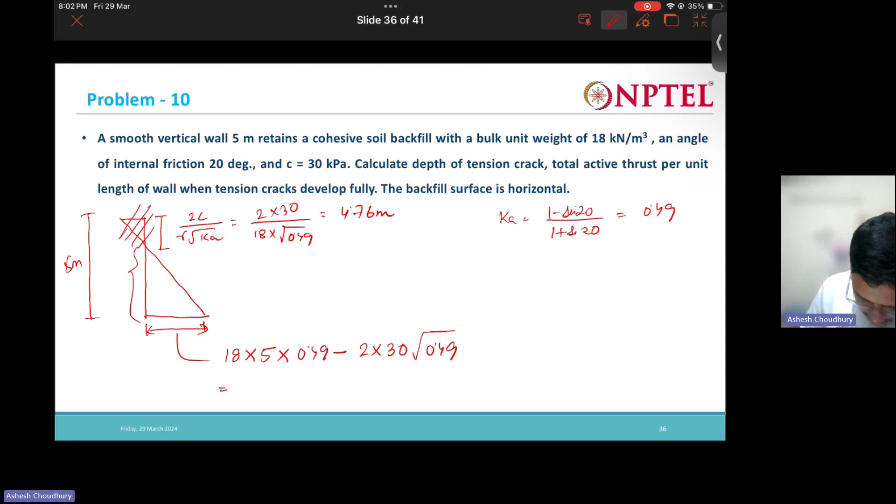So this will give us, therefore total PA I can get as half into 2.1 into height, right? Height is 5 minus 4.76, so this will come out as 0.252 kilonewton per meter. Okay, so very less.